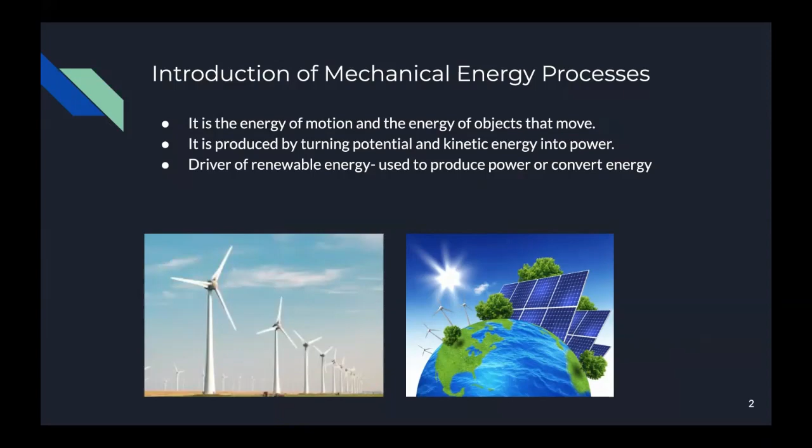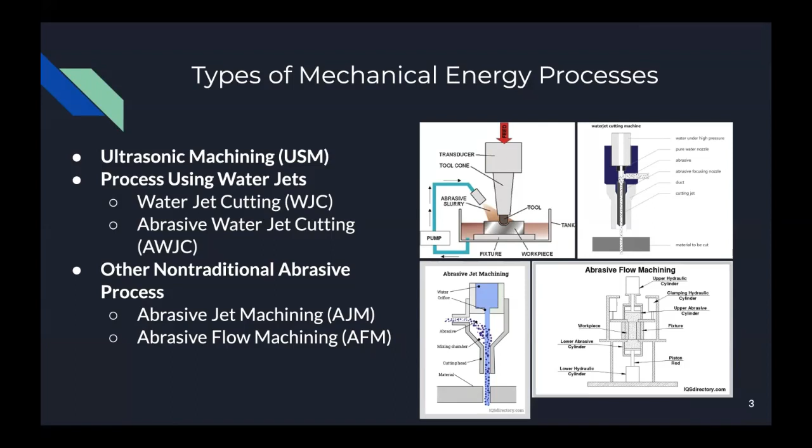There are different types of mechanical energy processes that we'll be going into today. The first is ultrasonic machining. There are also two different types of processes using water jets. The first is water jet cutting and abrasive water jet cutting, which are very similar. There are also non-traditional abrasive processes called abrasive jet machining and abrasive flow machining.

So why do we need non-traditional machining? This unique process takes advantage of the fact that there's no physical contact between the tool and workpiece. This non-contact nature allows manufacturers to work with very hard and high-strength materials such as ceramics, titanium, hardened steel, both efficiently and accurately. Due to the strength of these materials, standard machining processes would not be viable.

It also allowed for more complex parts that require any holes or internal-external profiles which were very hard to achieve using conventional machining processes. The way these processes were carried out also allowed manufacturers to avoid any damage to the surface that would often result from the stresses created by conventional processes.

In summary, non-traditional energy processes were a total game changer for the industry. It allows engineers to work with a wider variety of materials, tackle complex designs, all while maintaining the structural integrity of the workpiece.

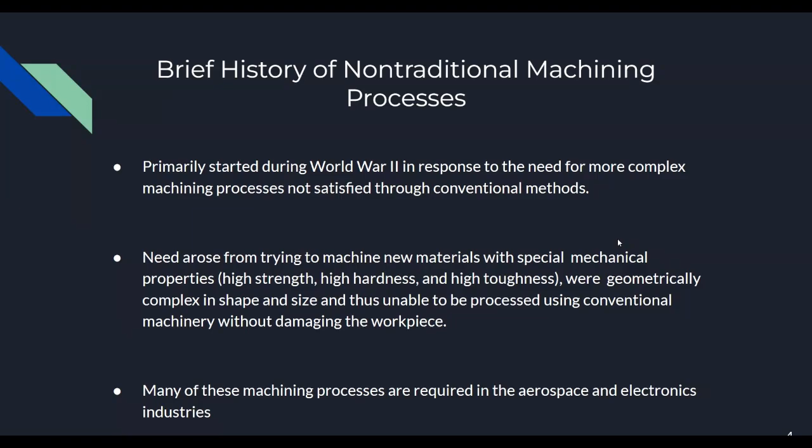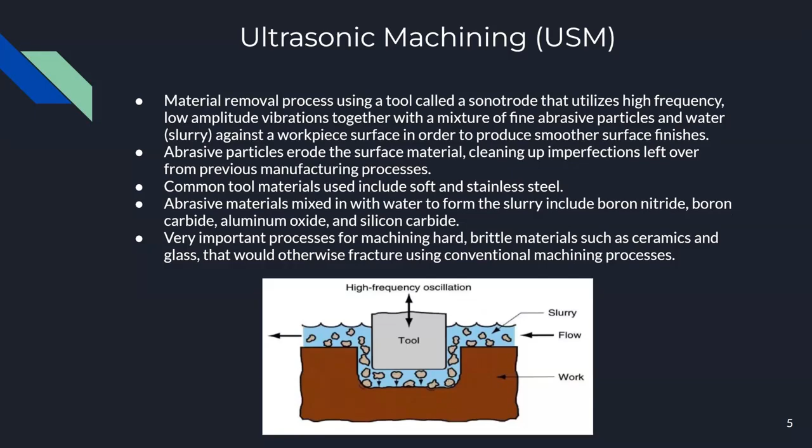Hi, my name is Alex Padron, and I wanted to talk to you guys about ultrasonic machining. More specifically, I wanted to talk about the working principle of ultrasonic machining. The principle and process is fairly simple. The transducer provides the vibrations to a tooltip, and this tooltip is typically of a geometry that you would want to impart onto the workpiece or the work surface. So if you wanted a circular dimension hole, you would want the tooltip to be circular.

Apart from the transducer inducing the vibrations to the tooltip, there is a nozzle that lies in between the workpiece and the tooltip, and this nozzle provides the slurry, which is a combination of abrasive particles and water. And this slurry flows in between the tooltip and the workpiece. And as it's flowing in between, it slowly and gradually impinges on the surface of the workpiece, thus imparting the desired shape or size that is needed.

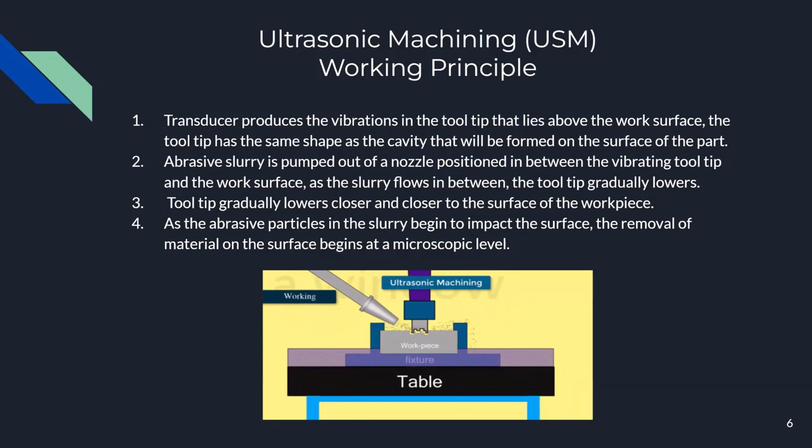Another process that is important to consider are the parameters that affect the material removal rates of ultrasonic machining. The material removal rate is inversely proportional to the cutting area of the tool. The larger the area that's desired to be removed, the slower the rate of material removal. Another factor to consider that affects the material removal rate is the frequency and amplitude of the vibrations that's induced on the tooltip. Typically, increasing the frequency and the amplitude of the vibrations will increase the rate at which material is removed.

And lastly, a very important parameter that affects the material removal rate is the type of abrasive particles that are used in the slurry, as well as their shape and their concentration, as this will likely affect the kinetic energy that is needed for the slurry to slowly chip away at the material.

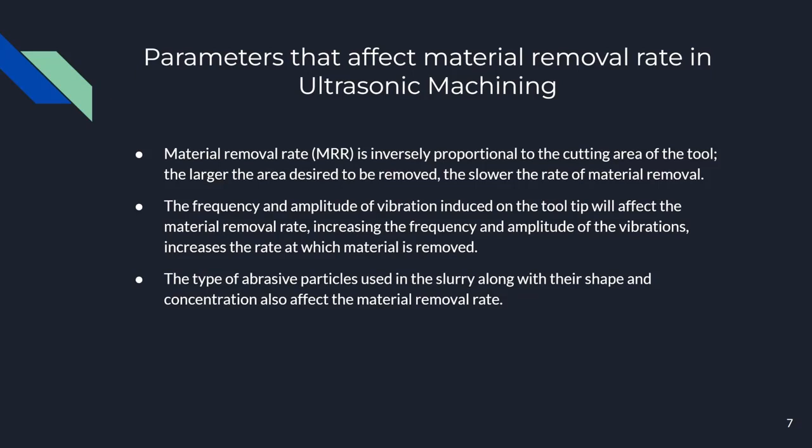Water jet cutting uses a fine, high-pressure and velocity stream of water impacting the material surface perpendicularly. In water jet cutting, the fluids are preferred to be polymer solution because it tends to form a coherent stream. As the diagram shows, the fluid goes through the tube and is ejected by the nozzle directly to the surface in order to make sure the pressure approaches maximum.

There are several parameters that should be considered. The standoff distance between the nozzle and the surface is expected to be small to minimize the dispersion, but don't contact the surface. Change the nozzle opening diameter and the pressure of the fluid according to what material it is and how thick it is. These two parameters decide the rate of cutting feed, typically from 5 to more than 500 millimeters per second. Water jet cutting is usually automated using computer numerical control or industrial robots to control the nozzle unit along the trajectory we desire.

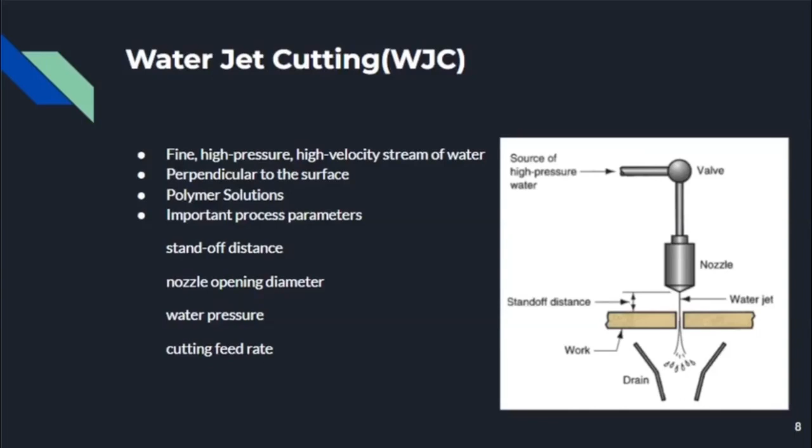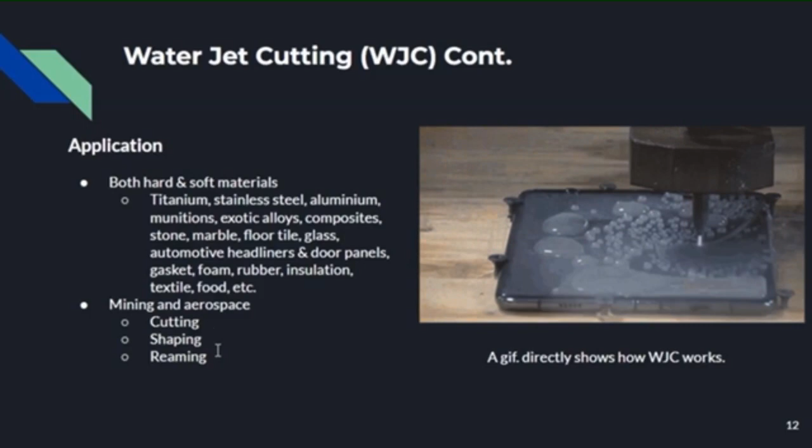In this GIF picture, we can see what it actually looks like. Water jet cutting is preferred to be used when the materials are sensitive to high temperature. It can also be used on both hard and soft materials, such as the following examples. We can also see water jet cutting used in mining and aerospace areas to cut, shape, and ream the target objects.

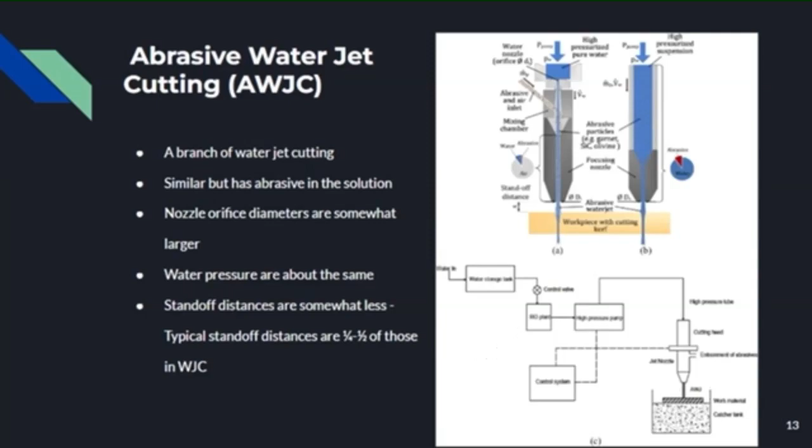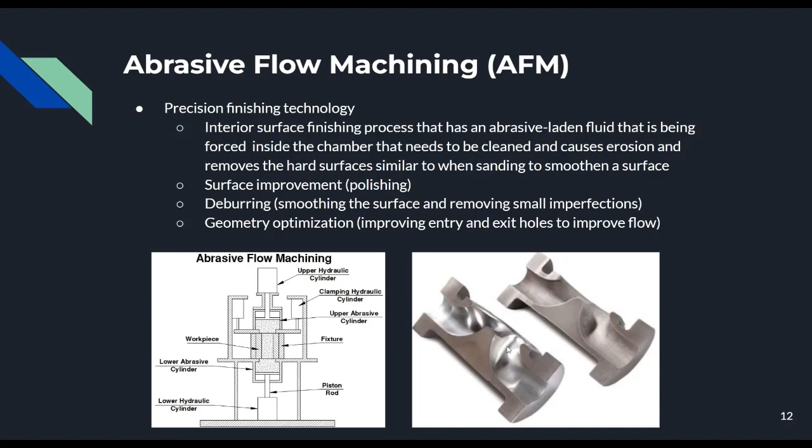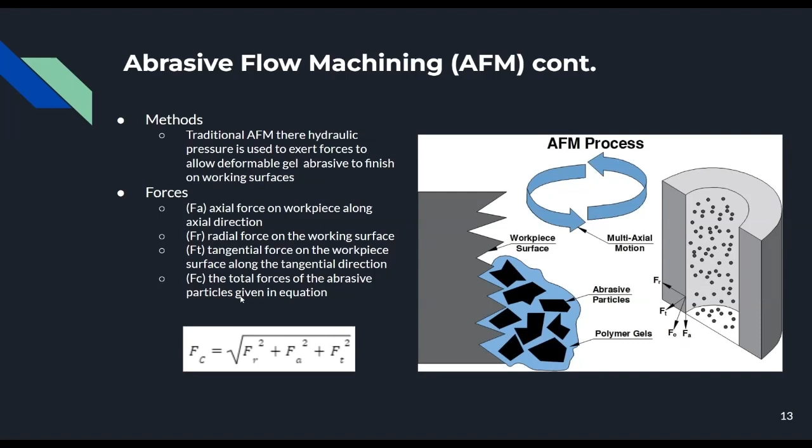To continue on abrasive flow machining, hydraulic pressure is used to exert forces to allow the deformable gel abrasive to finish the working surfaces. The forces present are the axial force Fa, the radial force Fr, and the tangential force Ft, as you can see in this image to the right. And Fc is the total force on the abrasive particle, given in this equation right here.

Hello everyone, my name is Benjamin Viscondi, and I'll be going over the abrasive jet machining process for our project. This process is also known as microblasting and is somewhat like water jet cutting, which was previously discussed. However, rather than using a liquid solution, fine particles commonly known as abrasives are used. These abrasives are small spheres with a diameter of about 0.001 inches or 0.025 millimeters. Some examples include aluminum oxide, iron oxide, silicon carbide, and powdered iron.

These minerals are introduced into a mixing chamber where they are combined with high pressure air obtained from a compressor. A vibrating bottom at the base will help the chamber mix the air and particles thoroughly. Then once mixed, the two will be transported via a line to a nozzle, and in order to create the blasting process, Bernoulli's formula will have to be used.

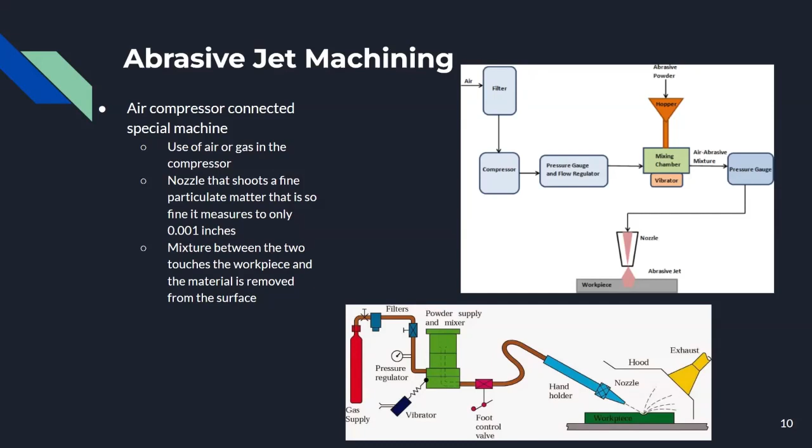This means that as the pressure decreases when leaving the nozzle, the velocity of the mixture will drastically increase. This high velocity abrasive will then hit the work material and begin to blast away any unwanted pieces or material through friction. Once this process is finished, the manufacturer will be left with a smooth finished piece.

Combining these with the fact that rho times volume is equal to mass, we can manipulate the equations for that first part of the solution. So in order to get rid of our density A, or rho A, you can divide out by rho G and then plug in 20. And then in order to get rid of our volume flow rate, what you can do is divide by volume flow rate of G, and you'll be left with 1, and then you can plug in 0.2 for that VA over VG. After completing all that, you'll be left with 4/5 or 0.8, which will be your final answer for alpha.

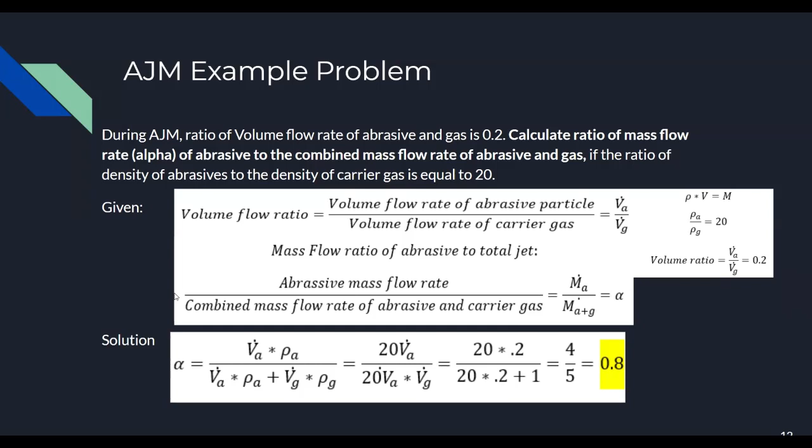Each process has its different advantages and disadvantages. I'm going to first be going into the advantages of the applications. Ultrasonic machining has high precision. It has the highest surface finish available in all other processes. It also has low cost and high speed, so it uses minimal energy but has high production rates. It also easily cuts through extremely hard and brittle materials.

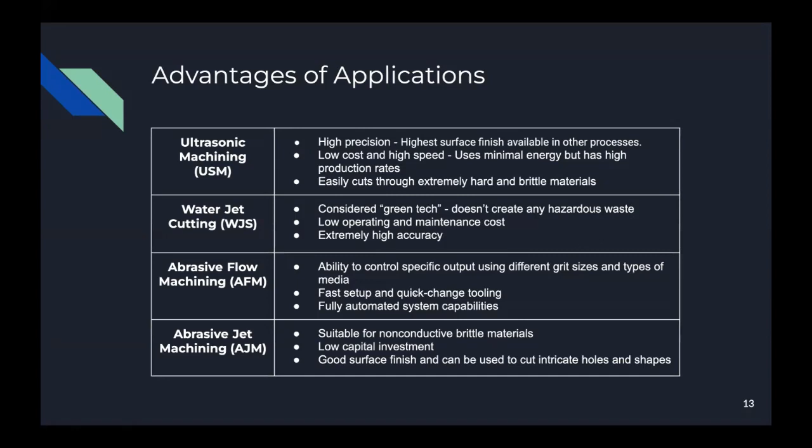Water jet cutting is considered green technology, meaning that it doesn't create any hazardous waste. It also has low operating and maintenance costs and has extremely high accuracy. Abrasive flow machining has the ability to control specific outputs using different grit sizes and types of media. It also has a fast setup and quick change tooling and has fully automated system capabilities. Abrasive jet machining is suitable for non-conductive brittle materials, has low capital investment, and has good surface finish and can be used to cut intricate holes and shapes.

Each application also has its disadvantages. To begin, ultrasonic machining can't be used on soft materials. Its cutting tool has a quick wearing time, meaning that each time it has to be changed, it causes a lot of waste. It also has high power consumption, which leads to high cost. Water jet cutting has slower cutting times, meaning lower production rates. It is also difficult to machine hard materials and has high starting cost. Abrasive flow machining has the disadvantage of surface integrity with low surface finish. It also has high machining times.

Abrasive jet machining is not suitable for soft and ductile materials. The abrasives used are also not reusable, so the collection and disposal of the abrasives is problematic and also requires lots of cleanup. It also has limited nozzle life due to quick nozzle wearing, meaning that it causes waste because of the changing of the nozzle.

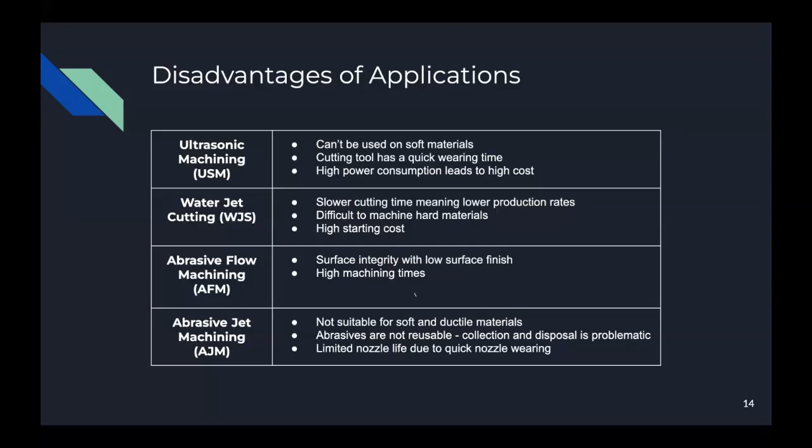Our final 380 project helps us dive deeper into mechanical energy processes and discover what these non-traditional processes are and how they work. In summary, these techniques offer diverse capabilities to meet the evolving demands of modern manufacturing. Each of the four methods we discussed, ultrasonic machining, water jet cutting, abrasive jet machining, along with abrasive flow machining, has its own unique set of strengths and applications. Take ultrasonic machining, for example, which helps achieve accurate and precise cuts, well suited for hard and brittle materials like ceramics and glass. The high-frequency process allows for intricate cuts to be made that were nearly impossible before.

Then we have water jet cutting. This versatile process utilizes the high pressure of water as it flows through a jet to cut cleanly through material without inducing any heat effects, thus not providing any risks to the structural integrity. Then we can also add abrasive to this process to cut an even harder material, which would allow more variety of materials to be used. Next, we have abrasive jet machining, which operates similarly to water jet cutting. However, it uses an abrasive gas mixture that can be used in both cutting and finishing operations.

Lastly, we have abrasive flow machining, which offers a unique approach to finishing complex parts by using a semi-solid abrasive, which can polish and deburr hard-to-reach internal passages or intricate shapes. This process is particularly valuable for achieving high precision surface finishes and ensuring the quality of complex components. So whether it's achieving precision cuts in hard materials with USM, providing clean cuts with AWJC, or achieving high precision surfaces with AFM, these processes are shaping the future of manufacturing by offering innovative solutions to complex machining challenges.